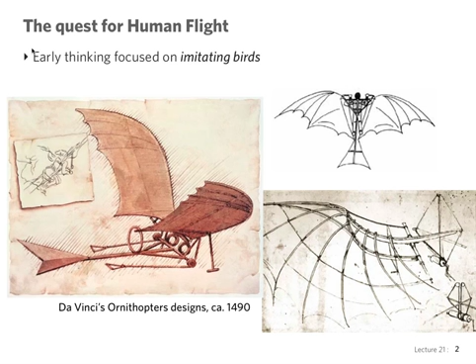The first human flight, as most of you know, became a reality in 1783, thanks to hot air balloons. And so this is the first human flight, on a hot air balloon. It flew about 5 miles across Paris, and this became a sensation, of course. And it's interesting to note that balloons were the only means of human flight for almost 100 years.

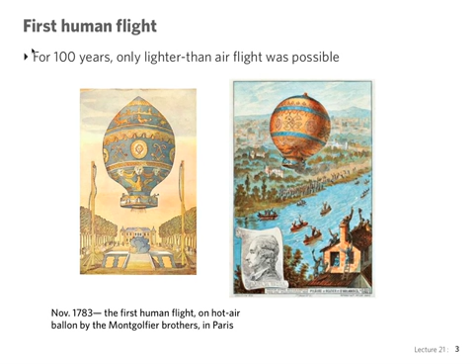And also the technology of hot air balloons contributed nothing to the technology of current flight. It's completely separate and empirical. So it really contributed nothing to our progress in powered flight as we know it today. And perhaps some of you may not be aware of the fundamental ideas of heavier than air craft, separating out hot air balloons, which are based on what we could call aerostatic forces, right? It's basically buoyancy, and we distinguish that from aerodynamic flight with heavier than air craft.

The fundamental ideas of heavier than air craft are, first, that you can produce this force of lift or sustentation by moving an inclined surface in the flight direction. First fundamental idea, and it's a great leap of the imagination compared to the idea of flapping wings, right? Now we might take it for granted, but imagine what it was for humans at that time to leap to this concept that you could actually generate a force by just moving an inclined surface, without flapping, in the flight direction.

Of course, this is associated with a second idea, which is fundamental, which is that power is required to compensate for the air resistance. These two ideas are crucial and fundamental, and they were put forth by Sir George Cayley in a three-part paper that he published between 1809 and 1810.

Most of the time we think about the Wright brothers, right? The first who accomplished powered flight, as we know. But this guy actually published all the fundamental ideas about flight in 1809. So that's almost 100 years before it was accomplished. I think to get our head around that is pretty amazing.

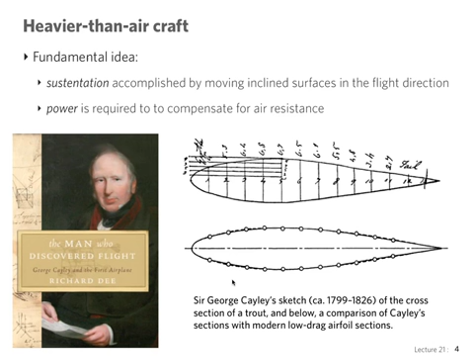Sir George Cayley, then, called the father of aerodynamics. Here's part of the portrait of him that is most known. In this work of his called On Aerial Navigation, which I said was published in 3 parts, and I have found a reproduction, I'll put it on Blackboard for you, he had several crucial ideas about flight. The distinction between lift and propulsion that we just discussed, right?

The idea that you can generate the sustentation or lift, this force that is opposite to weight, by just moving an inclined surface in the direction of flight. And that you required power to overcome the resistance of air. Those are the two fundamental aerodynamic forces that are able to produce flight. The propulsion, that it needs to overcome resistance, so drag is already implied there, and lift; obviously weight is the fourth force that we deal with when we talk about flight.

So a fundamental idea that he had in this work, the use of a fixed wing to generate lift. Fixed wing, this is a tremendous leap, because all history until then, thousands of years of people thinking about flight, was based on flapping wings, imitating nature. He states in this paper, for the first time in history, that lift is generated by a region of low pressure in the upper side of the wing. A fundamental idea.

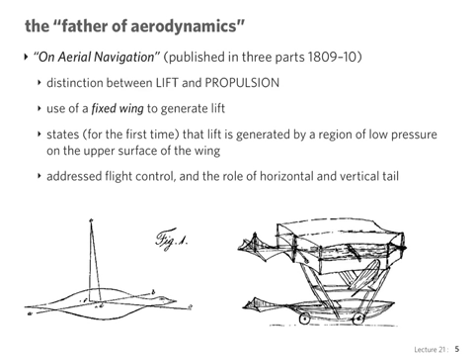And this was a triplane. If you notice in his drawing, there's 3 surfaces generating lift, and already you have these surfaces that help control the craft. So this is actually the origin, the real father of human flight and aerodynamics, Sir George Cayley. Very interesting read, actually, preparing for this lecture, to remind myself of the accomplishments of a man that was a very, very prolific engineer. In fact, he also invented the concept of the caterpillar, the traction that tanks have, and he never capitalized on that idea. It's very interesting.

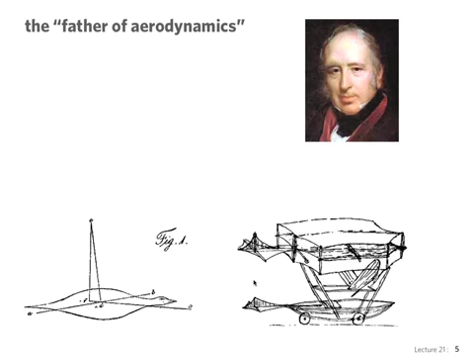So, going back to, these papers were published in the beginning of the 19th century, right? His three-part paper, 1809, 1810. So for almost 100 years, there was this kind of lull in the progress in this subject. But the basic problems that 19th century flight theorists had to deal with were

two problems. One, how to determine the power required for flight. Remember, Cayley identified that we had to generate some power to overcome the resistance of air to be able to move an inclined plate, which will generate the lift. So what is the power required for flight? Basic problem.

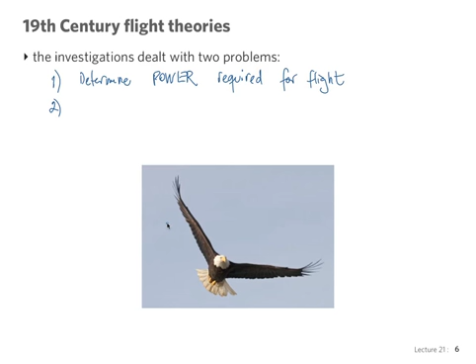And the second problem that occupied 19th century enthusiasts, mostly enthusiasts and empirical workers rather than scientists and mathematicians, since at this time it was developed completely as an empirical science, was to find the most efficient shapes for wings.

So let's talk about this first problem, the power required for flight. All of these studies at the time were developed through observation of birds, looking at nature to inspire the progress of engineering. And the most interesting observations came from looking at what's called soaring birds, birds that are able to glide. And the question was, what is the power required for a soaring bird to maintain a fixed altitude? That's the first question.

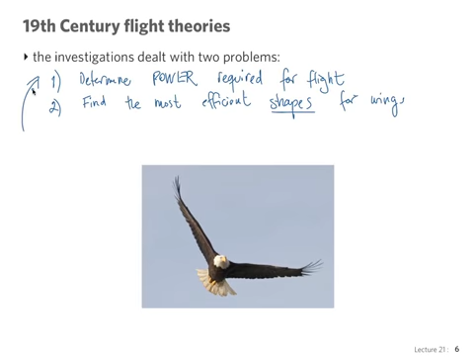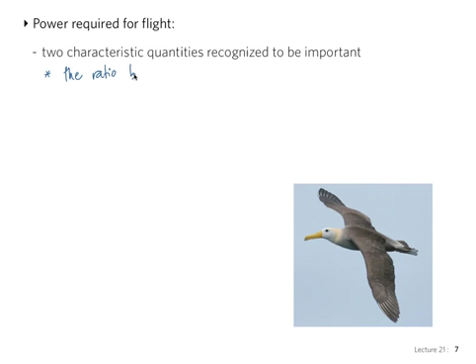So the power required for flight. There are 2 quantities that were recognized to be important in this question. One is the ratio between the weight and the wing area. So this is weight divided by wing area, otherwise known as wing loading.

And the other quantity is the ratio between the weight and the power available. The power loading.

For bird flight, of course, the power available is the muscle power that the bird can exert during flight. And one may assume for the bird that this muscle power is somehow proportional to the weight of the bird. So the more muscle the bird has, the more power it can exert. It's kind of the reasoning of the time.

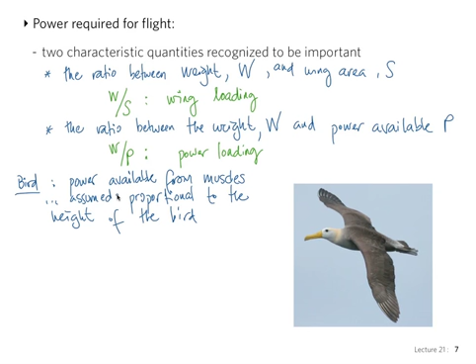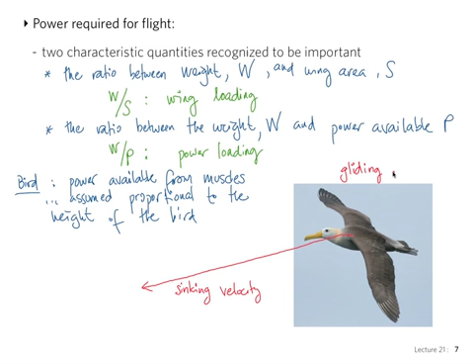So for the power required, the first thing to look at is the situation of a soaring bird. So this is a bird that is just gliding along, and the question is, if the bird is just soaring, without flapping its wings, it's going to be actually flying in a certain direction, and it's going to be dropping in altitude. Basically, it would lose a certain altitude in unit time, and this is called the sinking velocity. This is a bird gliding. We call them soaring birds.

So the question is, how does the bird manage to fly horizontally? The bird will obviously flap its wings every so often and thus impart some power to his situation, and the bird will probably do this just as much as necessary to raise its body to overcome the sinking velocity. So the bird will want to every so often bat its wings to recover that altitude that it loses naturally as it glides. And so this is the only possibility to fly horizontally. Just as much power is necessary to counteract the sinking velocity.

Right? So, in fact, this leads to an estimate that the power required per unit weight has to be proportional to the square root of the wing loading. The wing loading is W over S. So power required per unit weight, notice, is exactly the inverse of the power loading. So if I write this again, P over W has to be proportional to the square root of W over S. Well, this argument led to that estimate.

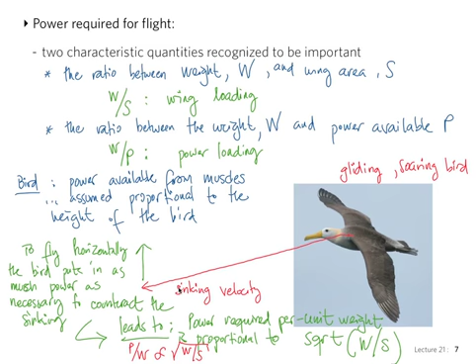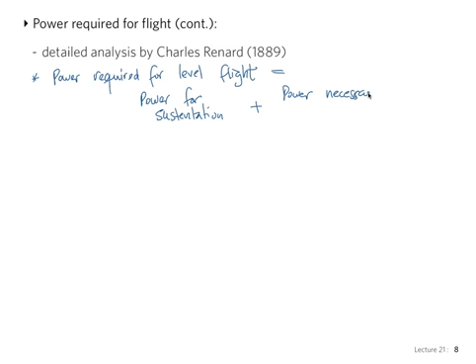So, some more detailed analysis. We're already in 1889, so 80 years after the publication of Cayley's famous paper, and still, progress is very sluggish in this matter. Charles Renard, a Frenchman, expressed the power required for level flight as the sum of the power necessary for sustentation and the power necessary for propulsion. The power necessary for propulsion being equal to the drag multiplied by the speed. Force of drag times the distance divided by time is power.

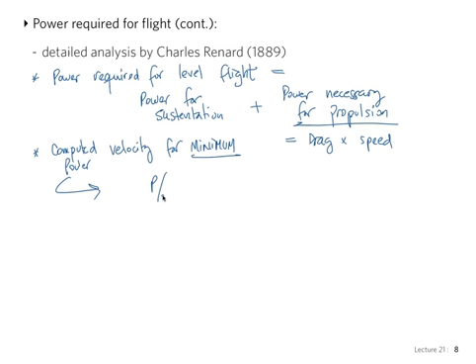Then he computed the velocity at which the power required is a minimum. And he obtained with this P over W, the power per unit weight, equals a constant times square root of W over rho S. So we have the density of the air coming into play here, and this is the wing loading. And this constant then was to be found by experiment. So with this understanding, it's interesting to see how the wing loading of many different sorts of birds actually changes with their total weight. And how does this look?

Yes? That drag times speed is the sum of both. No, it's just this one. The power needed for propulsion. Excuse me? Sustentation. Another word for lift is the word that was used at the time because in the tradition of the hot air balloons the vertical force was the sustentation that was obtained from buoyancy, and so it remained the word in vogue for this vertical force. Now we call it lift, of course, but in the historical discussion, many books still use the word sustentation. It comes from the ballooning tradition.

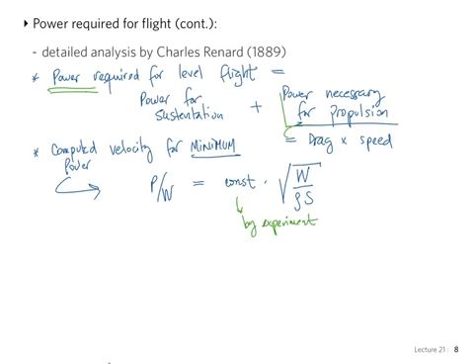So now that this understanding exists, let's look at the wing loading of birds. I have a little picture that appeared in a historical little book in aerodynamics published by the famous Professor Theodore von Karman. It appeared in 1954. You can get it quite cheaply now in one of these Dover reprints. Nowadays there are many of these sort of plots, but this is the first one that appeared, I believe, in print in 1954.

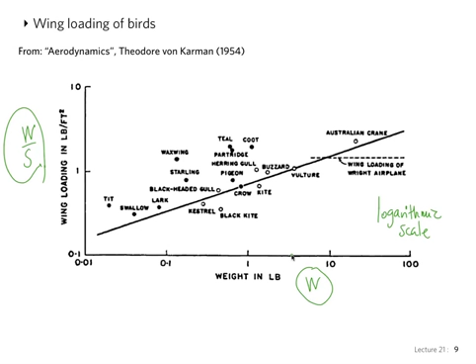But think about the implications of this. This is a logarithmic scale, and since the power which a bird can exert with the muscles is approximately proportional to the weight, then this, so let's be careful with this argument here. So the power which a bird can exert by its pectoral muscles, oops, bird, it's a bird.

I'll get to that in a moment. Ignore the line for the time being. I'll explain it in a second, okay? For the moment, just look at these dots and agree with me that the wing loading increases with weight. Sort of, approximately, or let's just say in general, because it's just a very qualitative observation. Wing loading increases with weight. Okay? And then we make the following argument.

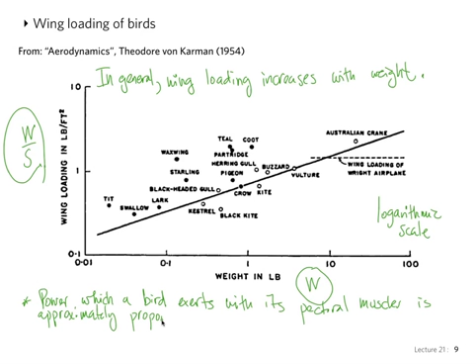You see that thought? So the bigger the bird, the harder it is to fly. The conclusion of this argument is that there should be a certain size beyond which living creatures cannot fly. There should be a limit to natural flight by muscle power. Think about that for a moment. Yes? You see the argument? Okay. Perhaps some of you are familiar already with this, but perhaps some others are not. So let's carry on.